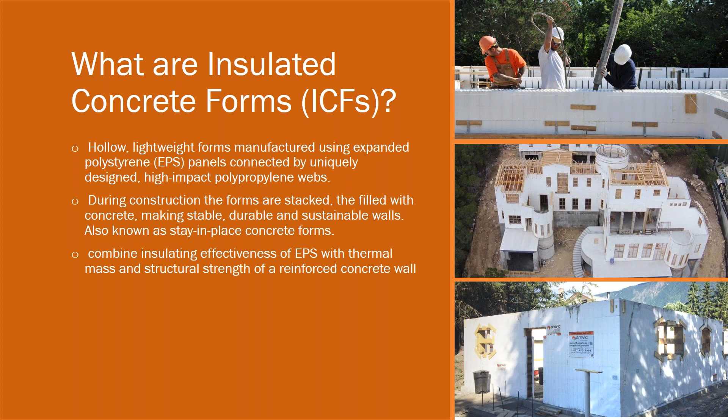When you're doing it for as long as I have, we don't assume anything, so what are insulated concrete forms? ICFs, that's our industry acronym. Basically, they're hollow, lightweight forms manufactured using expanded polystyrene, EPS panels, connected by uniquely designed high-impact polypropylene webs. During construction, the forms are simply stacked, then filled with concrete, making stable, durable, and sustainable walls. We're also known as a stay-in-place concrete form. The combined insulating effect of EPS with the thermal mass and structural strength of a reinforced concrete wall gives you a superior building envelope.

Why use ICFs for your multi-story build? I put resiliency at the top of my list here today, and anyone who knows me knows I have a background in green. I used to be an environmental consultant, and that's what I breathe a lot of passion into. Mark my words, this word resiliency will be the next green movement in the United States, if it hasn't already started. I want to come back to that. Energy efficiency, of course, is huge. In the early days, we were definitely moving people towards net zero structures. We're doing net zero ICF schools now in Kentucky of all places.

By getting that baseline demand down, we can start to play a little bit, and that gives us some really interesting results. Sound attenuation: I personally live in my second ICF home. Anyone who is a tenant in an ICF structure or resides in an ICF home, the very first thing they will say is how quiet the structure is. And of course, that's all part of comfort, and if we have comfort, that means we're going to get retention. Fast construction methodology means earlier occupancy and fast return on investment. Insurance reduction, significantly reduced long-term maintenance costs, and tenant retention.

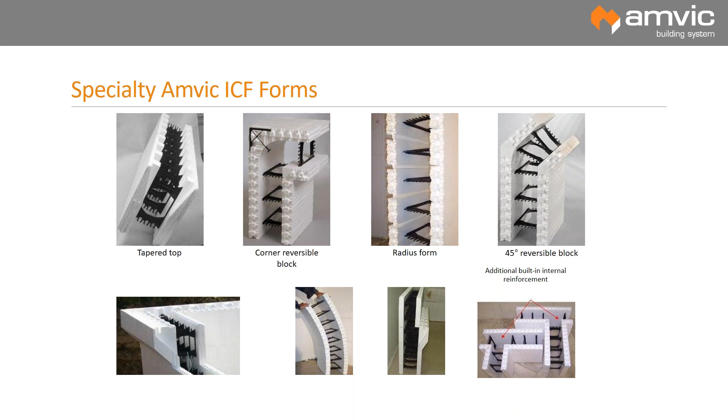This 9-to-1 construction methodology, I'm kind of the laughing joke in the company because I keep increasing this number. It used to be like a 4-to-1 or 5-to-1. But we have so many cool things that happen once this form is in play. It's a perfect substrate for acrylic, a hard stucco coat. And I argued in one back in 2006 that ICFs do not equal EIFS.

For anyone who's been involved in the EIFS industry, exterior insulated finish system, they were involved in a lot of class action lawsuits, because water would migrate past the foam board and get in behind to a wood stud, and then we'd have all kinds of issues. We're simply rendering a coating over the EPS foam.

And some of you may or may not know that Amvic is an EIFS supplier. We actually make 2x4 foot panels here in Toronto to very close tolerances to support the EIFS industry. And we're basically using the same foam bead as we would use in an insulated concrete form. So when you're looking at your acrylic stuccos, which is my preference because of their tensile abilities, it's a perfect adhesion with the ICF.

And with a lot of hard work from myself and others, most of the major stucco suppliers today have details on their websites on how to apply stucco coatings on an ICF wall. Utilities are easily installed with ICFs. After the pour, all we're going to do is simply use that foam as a chase to run our wiring, and most plumbing is done on the interior of the buildings, especially in the north, but it's very easily obtainable.

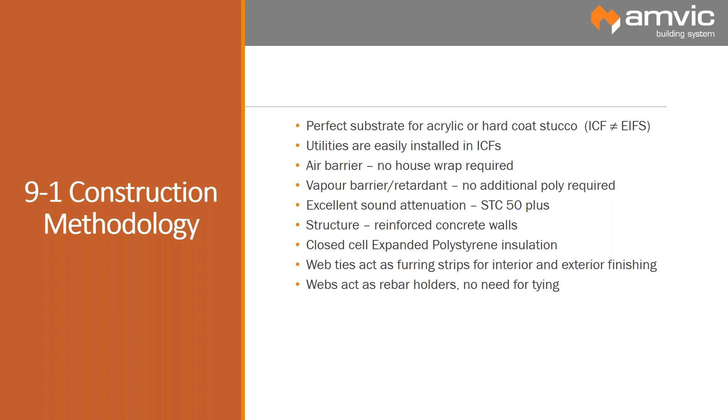Features and benefits: well, ICFs address multiple fire codes in commercial buildings. Just a one-shot deal. We don't have to bring in or address other issues. We address and exceed changing wind and energy codes with no additional layering or reinforcement. I'll come back to that layering in a minute.

Properly designed ICF construction creates minimal waste on job sites, and this is noticeable. Your job sites are cleaner, they're safer, and they're better organized. All the years of doing this, I've never had any serious injuries on an ICF job site, and for a lot of reasons. It can be applied to a relatively unskilled workforce, provided lead hands are properly trained.

ICFs provide perfect concrete curing requirements. Very gradual hydration curves. Strong walls means strong walls. It's not unusual to pump at 3 and have these walls crack at 45 a number of years later. It's just that moisture that's retained in the concrete is a long, slow curing process, versus just strip and have the sun dehydrate the wall and lose a tremendous amount of the strength of the concrete in the process.

ICFs protect concrete from freezing during winter construction, which extends the building season and expedites construction times. It's one of the first patents that came out of Canada. That's why a lot of the ICF companies originated from Canada, since we obviously have a much colder season. But this little exercise here can save literally tens of thousands of dollars by not having to tarp and torpedo heat a building if you are building in areas with winter construction.

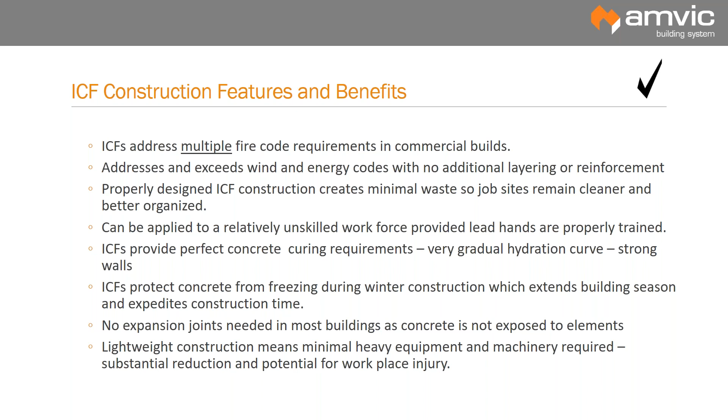Earlier occupancy: we looked at our occupancy rate, which grew from 2009 to 2015 from 54 to 65%. We've seen a relatively large surge in new hotel development throughout the United States. And this earlier occupancy for hotel owners is huge.

So with one of our Amvic customers, on a very conservative calculation, on a 50% earlier occupancy, it was a 180 room hotel. And we looked at a very conservative case where at that particular time only 90 rooms were occupied. And if we can get them in 2 months earlier, which is typically normal, that's 60 days. This computes to over $500,000 in revenue that's immediately going into your owner's pocket. The same will hold true when we get into multi-story apartment buildings, etc.

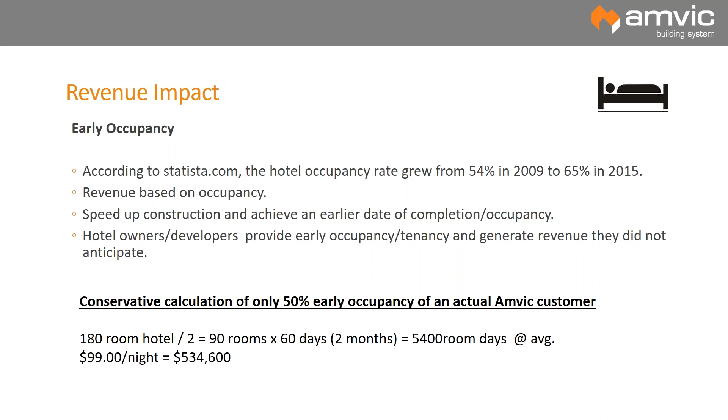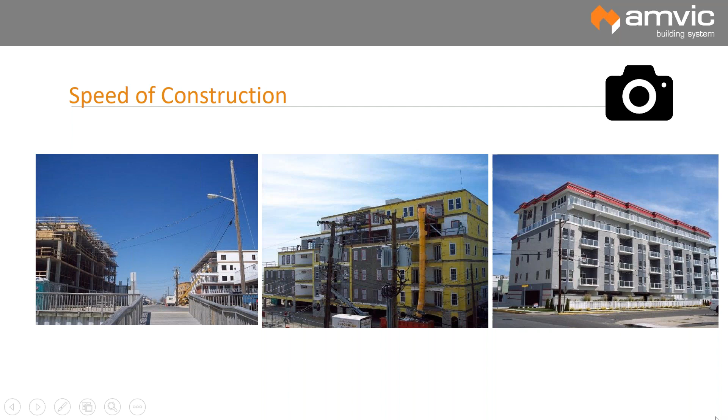So some examples of this. These are condominiums in New Jersey. You can see on the far left that we have traditional stick frame going up here, and then we're looking at an ICF structure here. Very quickly, we surpassed the stick frame. This is where the ICF structure ended up, and this is where the stick frame structure ended up. This product is now ready for leasing and renting. These people are still probably 2 to 4 months out. So what building would you like to be involved in owning and capturing that increased revenue?

When we look at getting into large stuff, I always say twice around the perimeter and done. I can't tell you how many times I've pulled up to buildings and watched them layer the building, going around and around the building. You can see here my lower levels are already closed in. Drywall is already in these rooms, although covered. And now we're looking at where the building is here, and we're ready to go that second time around and do our finishing. You also notice that no one's working on the outside of the building.

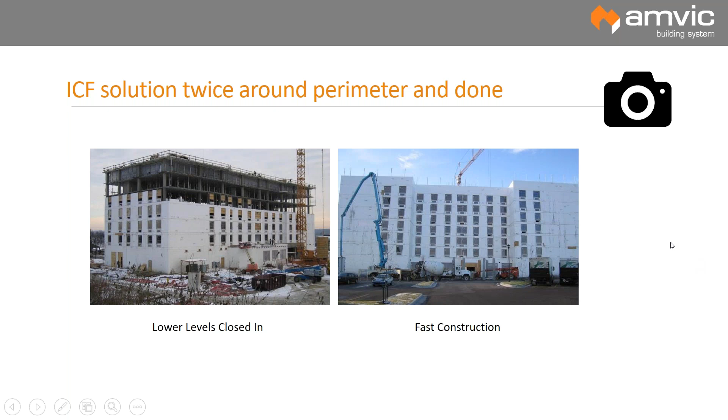Again, it's just the process: stack, brace, pour, floor. We're working from the interior out. So again, your safety risks go down. If I had my way in a perfect world, I really would be lobbying the Workmen's Compensation Group to get us a much reduced rate in this type of construction, simply because it's lightweight and we're preventing things like serious high falls. And then we're ramping things up even faster now.

So this is compliments of ICF Panelization out of Albany, New York. Mike Cleary and Stephen Bluestone are the owners of this company. Stephen Bluestone, I'll come back to Steve in a minute, is definitely an early adopter of ICF, and this is the next stage we're heading to now. In my humble opinion, our most challenging aspect in North America today is labor, and how fast can we get structures up? So we're looking at doing things a little bit differently.

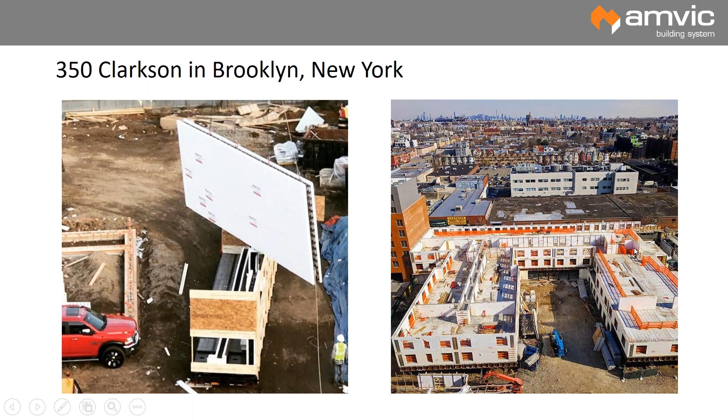This is an 8-story structure currently under construction in New York City, and the panels are manufactured in Albany, New York, and shipped down, basically ready just to be put in place, linked together, and attach the bracing. All the thinking is done in the factory, and then we bring in the pump truck and fill up the wall.

Drury Inn, this is, I guess, a long-term owner operator and an Amvic customer. Today operates over 55 ICF hotels, with 15 typically under construction on a busy year. 55. I always say to people, if this stuff wasn't working, do you think we would have gotten past the first hotel? And on average, most of their buildings are large, 8 to 10 story structures.

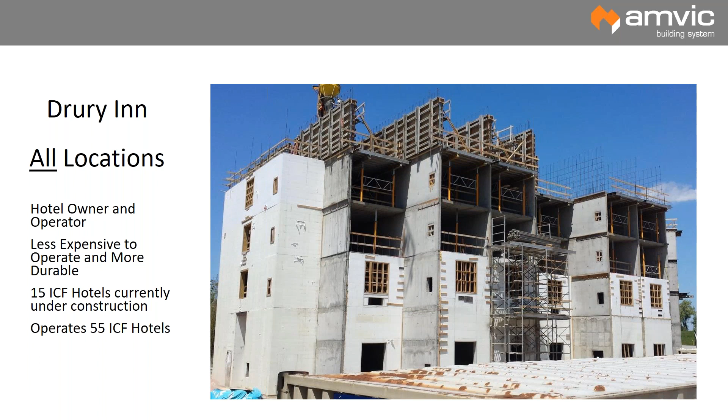Resilience. As I mentioned, I truly believe this is our next green movement in the United States. Last year was the most expensive in recorded history, with $306 billion in recorded damages from Gulf hurricanes and West wildfires. This is $100 billion more than 2005 when Katrina and Ike came ashore.

So IBHS, Institute of Business and Home Safety, I worked with those people in the early years, more or less for residential. I introduced their program to the people in the Carolinas for the first time, and we managed to get some pretty significant reduction in insurance. But now they're reevaluating commercial rates. Underwriters will continue to push for building code changes, particularly in coastal regions.

$306 billion in claims. Achieving disaster resilience with ICF construction is now an AIA accredited program, co-written and authored by Amvic, and you can access that on our website to get AIA credits. But again, things like that word resilience, et cetera, just haven't been in our industry, and they definitely need to be here now.

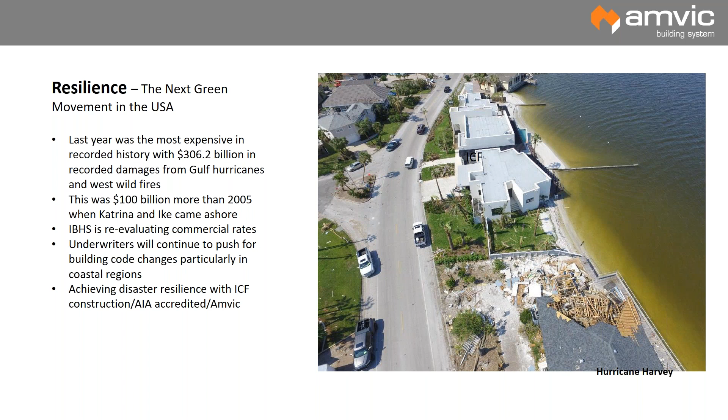So this is Hurricane Harvey, ICF structure there to the north, and then conventional stick frame to the south. I know this is residential, but think of the cumulative damages if we're looking at multi-story structures now. It really is a no-brainer when it comes to these wall assemblies. Wind loads, again, 200 to 300 mile an hour. It can be ramped up according to how we're placing our steel, compared to 120 mile per hour for stick frame.

The bigger thing too, we did projectile tests in the early days in Georgia. The first one I believe is in Georgia. This one says Texas Tech, where we're actually shooting projectiles at walls. Typical stick frame construction, those projectiles go right through the wall. Obviously, they just disintegrate when they hit an ICF wall. And they also will obviously be prohibited on a CMU, but I'll come back to the CMU in a minute.

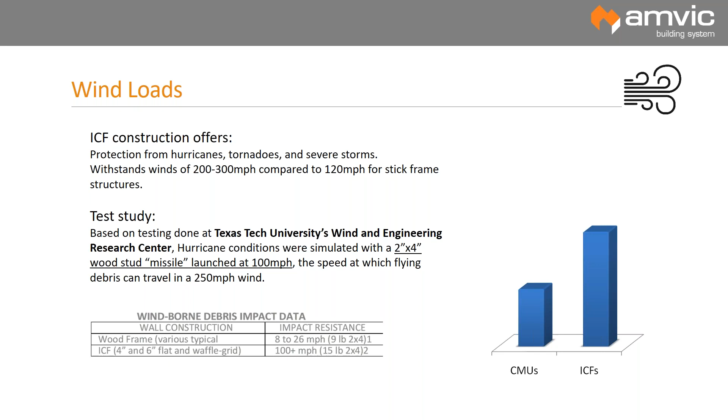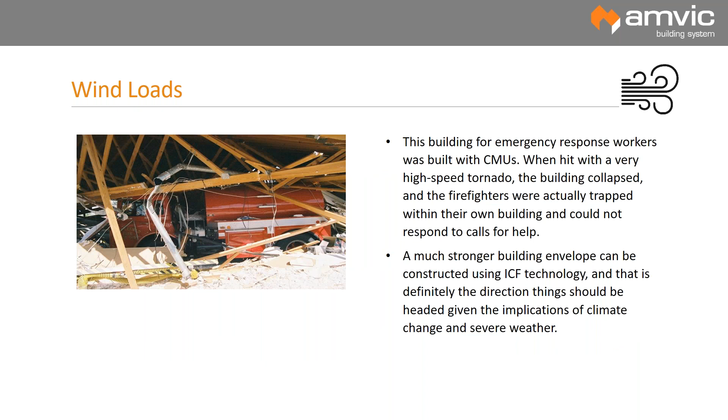So this is a fire station, took a direct hit of a tornado in Missouri. This was particularly embarrassing. The firefighters were trapped within their own building, and they just said we need to come up with a better way as things continue to change with climate and severe weather. So we rebuilt this structure. We used an 8-inch ICF. When you hear me say 8-inch or 6-inch, I'm always referring to the concrete core width. And we rebuilt this structure in record time.

As you can see, not a lot of openings, which is an ICF installer's dream. Your difficulties or your hiccups will be window and door openings. And we rebuilt this to an F5 standard, I believe, with large precast roof panels. You can see the beam pockets that were just cut into the ICF wall for these precast units to rest in and bear directly on the 8-inch concrete wall.

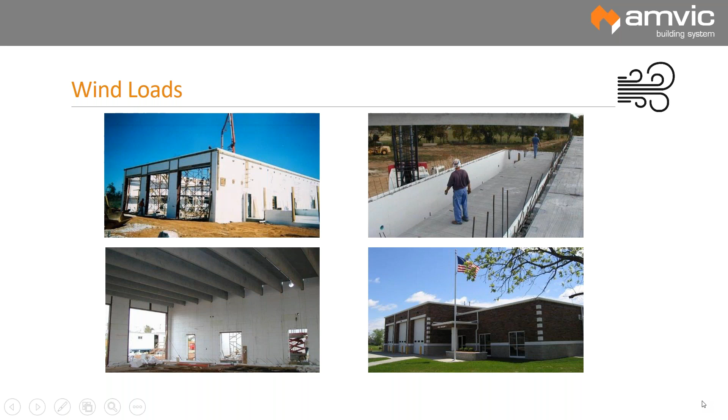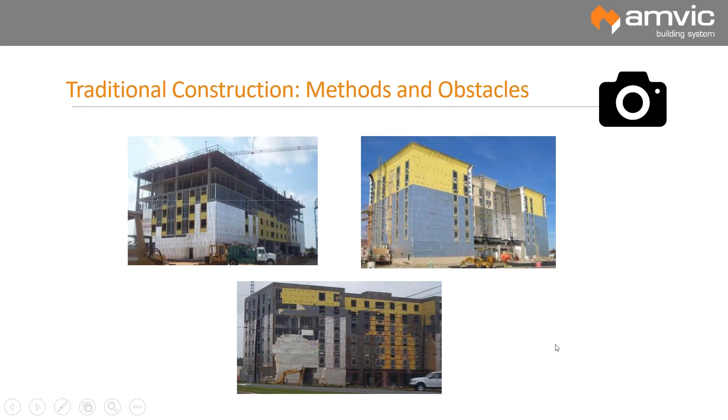But let's look at multi-story now, and this is one of the key reasons why Drury Inn moved to ICF. They got caught in a severe storm event. They typically do a steel stud EIFS assembly on the outside of their buildings. As you can see here, after the severe storm, it basically ripped the foam right off the steel stud. This was a multi-million-dollar claim. This hotel was about, I believe, 2 years late in opening. And that's when they sat down and said, we really need to rethink how we're building our structures.

Fire codes. Well, insulated concrete forms are very resistant to heat. 2 to 3 to 4 hour interior fire rating is easily obtainable. Basically, we have to be covered by a 15-minute thermal barrier, and there's some interesting things happening there besides just drywall. But the reality is we have that huge concrete core that provides phenomenal flame resistance. We're basically building structures that are just basically non-combustible.

By law, we have to have a flame retardant in expanded polystyrene. This is not foam packaging, which goes up like gasoline. EPS will self-extinguish without a constant heat source.

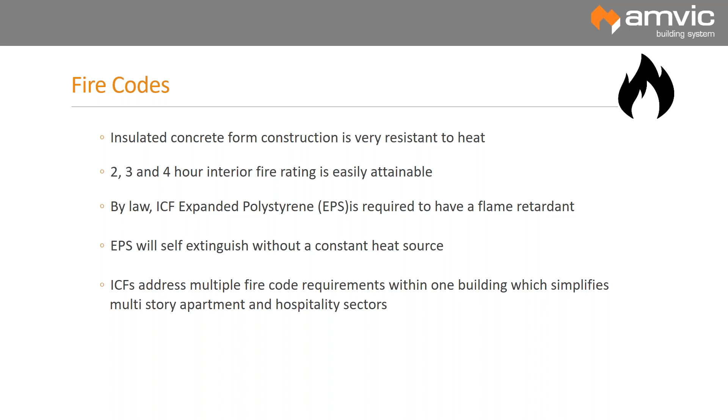ICFs address multiple code requirements within one building, which simplifies multi-story apartment and hospitality sectors. This is something that is very, very current. This presentation was done in November. U.S. fire marshals are going to drive change in the United States.

The current wood lobbying efforts to date, $33 million since 2012, have now allowed 4 to 7 story multi-story wood structures to be constructed with some devastating results. Please visit NRMCA's site and look at America's Burning, as they list numerous multi-story structures that have caught fire. These wood structures reach flash point in under 3 minutes, dramatically endangering first responders and occupants.

Just so you know, 3 minutes is basically the time the trucks are rolling out of the station. So when these trucks are coming to your particular multi-story building, all they can do is contain the fire. And these buildings are sprinklered as well, but when you have that amount of lumber with that amount of oxygen on multi-story, they become just infernos.

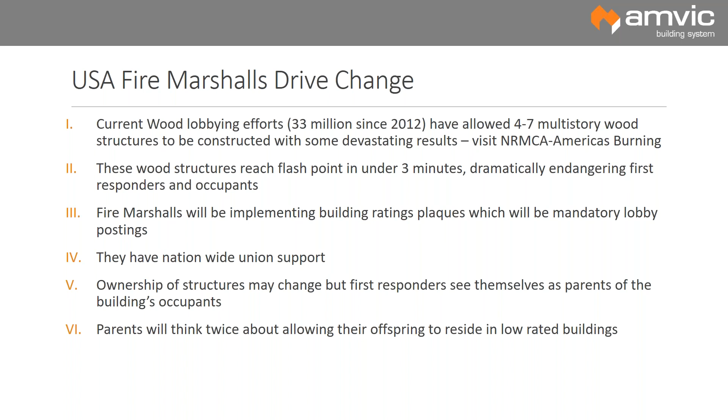Fire marshals will be implementing building rating plaques, which will be mandatory lobby postings. They have nationwide support. They have nationwide union support. Ownership of structures may change, but in their opinion, first responders see themselves as parents of the building's occupants. Parents will think twice about allowing their offspring to reside in low-rated buildings. So watch how this movement gains momentum because it's a serious problem and it needs to be exposed.

Resistive to explosive environments, something you would not think of. I was at Quantico Marine Corps Base, I believe this was 2006, and we detonated 50 pounds of military-grade TNT next to our ICF wall. That wall was nothing special. We had 16-inch, number 4 bar, 16-inch on center, 3,000 PSI. Basically on the far right here, you'll see after the blast, the concussion of the blast blew the foam off and exposed our polypropylene webs, but the structure stayed. So consequently, we get involved in a lot of first responder buildings, fire stations, police stations, military bases, etc.

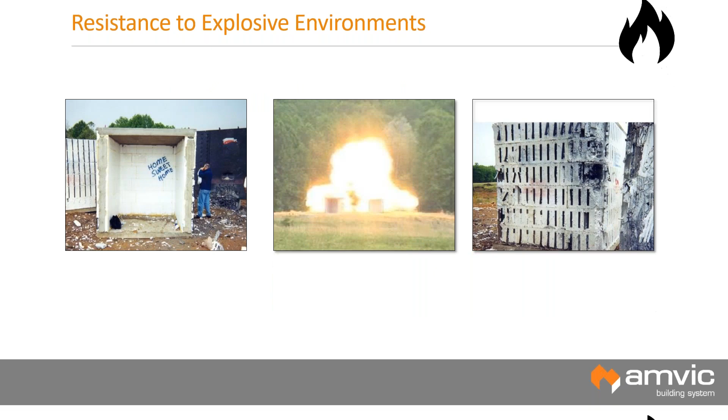Another dramatic example of this, compliments of Steve Bluestone. This was his building in New York City, and it was right sandwiched between a terrible natural gas explosion, which actually cost lives and completely demolished the building. But his ICF structure just received superficial damage, and he was able to get his tenants back in the building and occupied. Again, just a kind of a tribute to how strong these walls are.

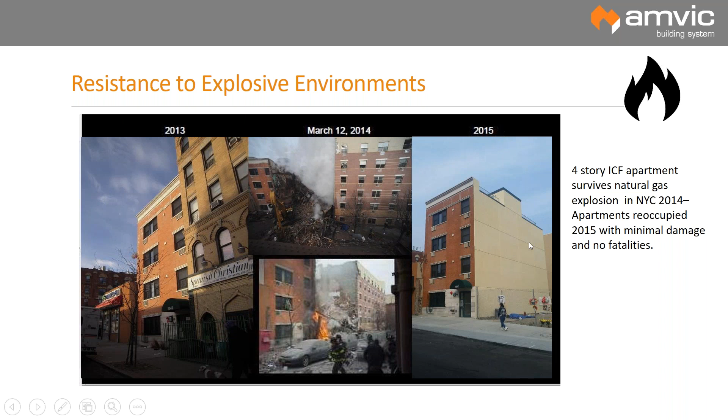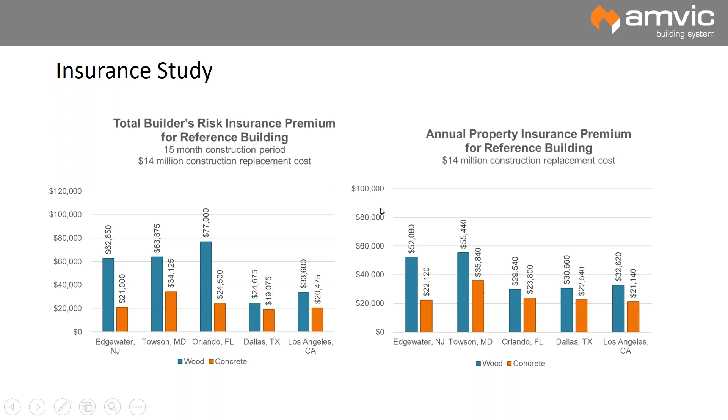Insurance study, we're getting more and more data in depending on different areas. But when you get into non-combustible, high wind, that type of thing, you're looking at possibly having greater savings on your insurance. If you look at some places like Orlando, Florida, look at the difference on concrete versus wood. And this is not surprising to me because obviously these areas are subject to a lot of very severe weather. And again, this adds to your bottom line as the owner developer, capturing much lower insurance.

Maintenance costs: effective 100-year service life, 200-pound pull-outs, no drywall pops, soft costs reduced, minimal repairs after severe storm events, no hollow wall cavity for potential moisture migration, i.e. mold development. In most of the southeast and south of the United States, when we get a severe storm event, I'm thinking of places like the Carolinas, Georgia, Mississippi, Florida, far over into Texas, if that stick frame wall is compromised, we'll get mold development within 24 hours. And obviously, if you have a multi-story structure and rumor gets out that there's mold in the building, you're going to have a difficult time getting tenants who wish to move into that structure.

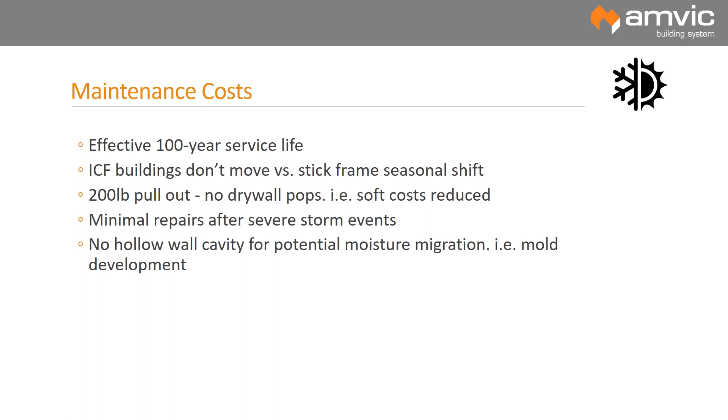So in the north, we have obviously much more severe weather, but I always say what happens 4 times a year? Well, 4 times a year we have a new season. And when we're looking at something like stick frame, that building will move. And when it moves, it creates problems and actually leads to the demise of the building because movement creates stress, stress creates cracks, cracks allow moisture infiltration, and now we have a much greater problem. So maintenance costs in ICFs are virtually non-existent.

Operating costs. We talked a little bit about that, but let's dig down a little bit further. A reputable hotel chain, we downsized their PTAC units from 9,000 BTUs to 6,500 BTUs. That's 240 volts to 120 volt wiring. The savings alone on that 5-story hotel was over $80,000 just in hard equipment and wiring costs. U.S. Department of Housing and Urban Development, they say we're looking at a minimum of 20 to 25% savings. I think that's very, very conservative.

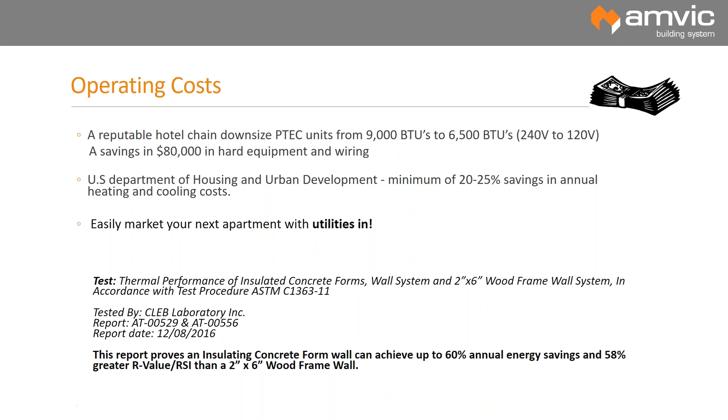In most cases, if you do this correctly, utilities will be so low you can market your apartments with utilities in. And it's been my experience dealing with the millennial population that there's lots of difficulties collecting in regards to additional costs over and above rent. So if you can market utilities in, that's a good thing to be said.

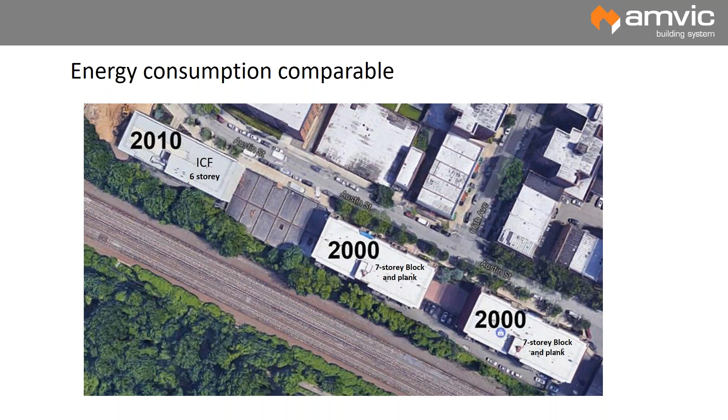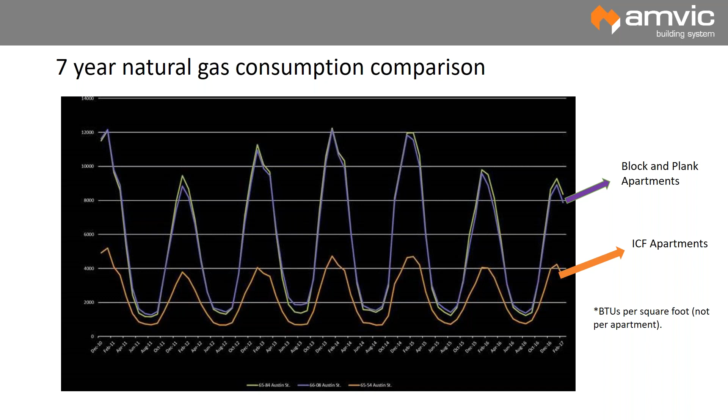So when we look at energy consumption comparables, again, this is compliments of Steve Bluestone, who again was an early adopter. You can see in 2000, he had 2 block and plank structures. And then in 2010, he did an ICF 6-story. But folks, look at the difference in the operating costs in regards to that ICF and block and plank. And what they're doing now is tweaking things like lighting and water conservation, et cetera, where we're going to get this number even lower. So again, a really good testament of how this stuff works. It's probably what others have realized, like Drury Inns, et cetera, that they're really doing well on the energy conservation of these buildings.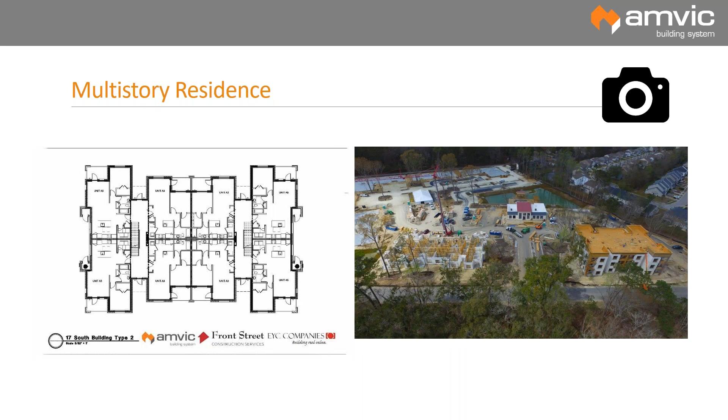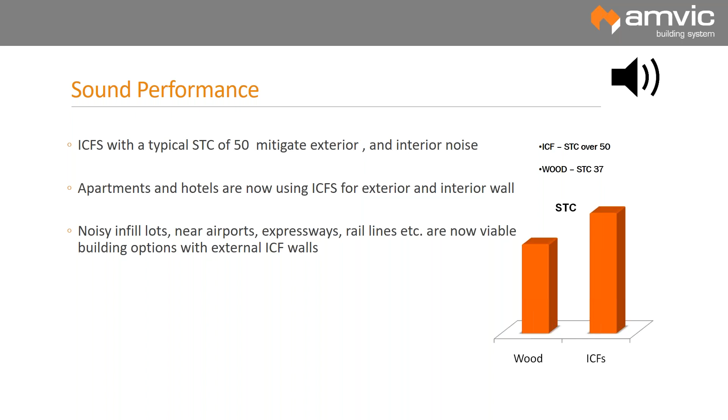So we can get involved in noisy infill lots near airports, expressways, rail lines, etc. We're now viable building options because we can cut that sound down. And on the residential side, anyone who's lived in an ICF structure, the very first thing they will tell us is how quiet the building is. Quiet is definitely a feature of comfort. If we have people who are comfortable, they're going to stay in your apartments, your condos, your retirement buildings. It's a big part of that comfort equation.

HVAC costs, I mentioned we can reduce those. Equipment, heavy machinery costs. Obviously, this is lightweight construction versus heavy construction. Even when we were doing panelization, those are light-duty cranes. We're not slinging huge, heavy mediums into position. Debt financing management: let's dramatically reduce your forward carrying debt.

When we look at stick frame on multi-story, in many cases the carpenters will come in and build extremely fast, and then they have their hand out for payment. Now you're carrying that debt way forward because that building is nowhere near ready for occupancy. We just have a 2-by standing there. Someone's got to come back and sheet it and insulate it and vapor barrier it and air barrier it, et cetera. Long-term maintenance costs obviously are going to be reduced as well.

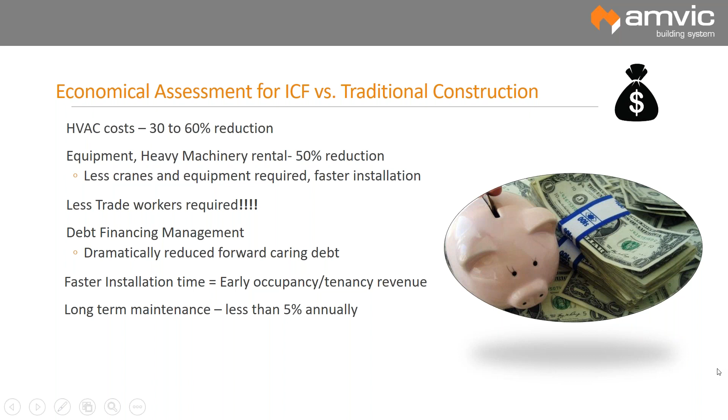So these are all really good stories, and it leads to the conclusion that people that do get involved in our industry with successful ICF builds simply don't go back. And that's our hardest thing, just getting people over that first hump.

So some examples of ICF commercial builds. The gymnasium here on the left was my first venture into the institutional side. This 24-foot high structure is actually sitting on a 4-foot grade beam, which we created with ICFs, which is on pilasters because we were on unstable soils.

The condominium complex is interesting. When we get into northern Canada where this is built, you can see that it has an acrylic stucco finish. He has to have his trades out of there by August 1 so they can start working on the finish, because we can't get into a freeze-thaw cycle. This builder has done numerous condominium developments with every other medium available, and once he used ICF, he's not gone back. Little things like small commercial builds can be done extremely quickly, and obviously we are picking up that ICF envelope.

Now we're getting into some bigger stuff. Student residence in Waterloo, Ontario. This was a 10-inch ICF form all the way to the top. Things have dramatically changed since I went to post-secondary school, where you're renting questionable homes to live in. These are state-of-the-art dormitories, and they're generating a lot of revenue for the investment partners. Anyone who's been involved with post-secondary residential accommodation knows these rooms are filled every fall.

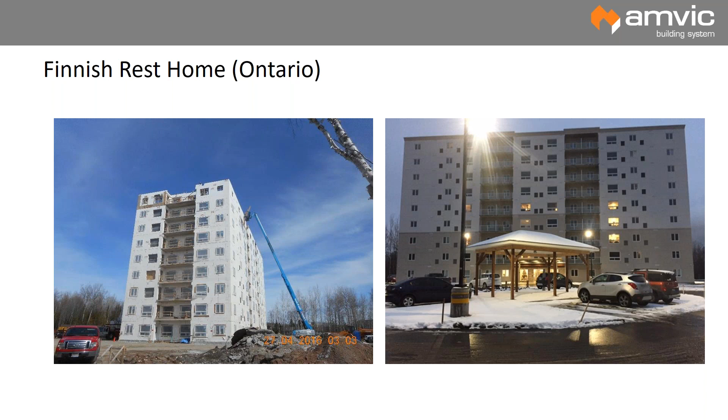Okay, this Finnish rest home was also an award winner this year at World of Concrete. What makes this one interesting is this particular owner developer used our new Plus form, which has an R28 versus an R22. His residents are extremely comfortable in this building, and he has plans to do several more with our technology. He was extremely happy receiving his award. Excuse me.

This is the ICF insurance building in San Antonio, Texas, and this is the one we'd like to play the video on. We're going to try that again. Okay, so I'm going to hand this over to Michelle and hopefully get the video going for you.

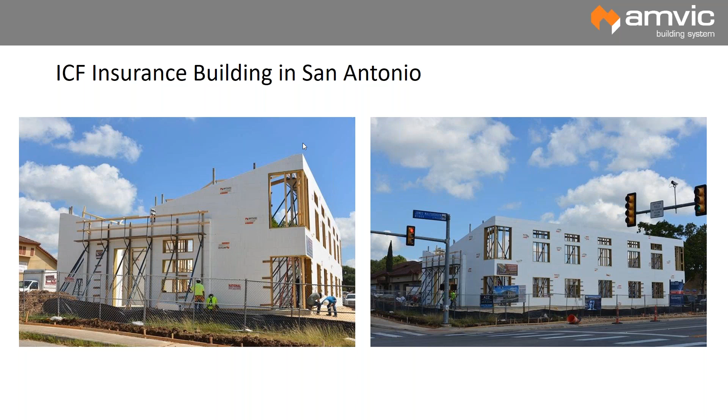Matt's an award-winning ICF installer. We have some more projects of his that we hope to submit for our awards next year, but he's kind of figured this out. This is a 24 to 26 foot high building. It's all one pour. You notice the guys were all working off of man lifts to expedite the stacking. Just a really good testament to what we can do with this product in record time. Obviously, the owner is ecstatic because he has the envelope of his building closed in, and now we're just into cosmetics. Are we ready for any questions? Hang on.

Okay. So what others are saying: the people at Avalon Bay were gracious enough to visit us at Charleston on EYC's development. In their opinion, we figure it's cost neutral. Just so you know, Avalon Bay is arguably one of the largest apartment builders in the United States. They're looking at a +/- 3% construction impact cost. They do believe it's 5 to 20% faster.

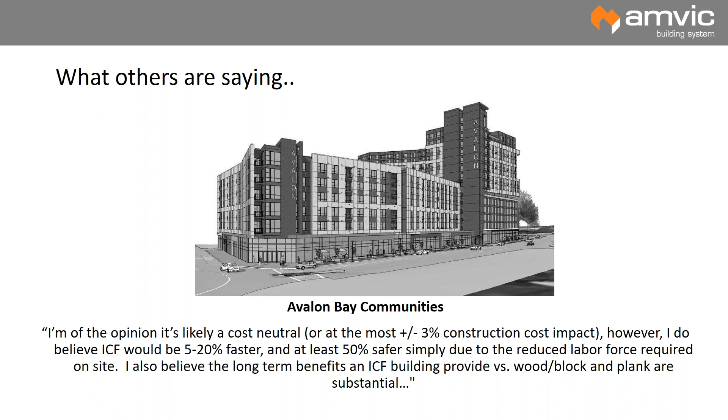I believe with the right approach, we can be a lot faster and at least 50% safer due to reduced labor force. That was one of the biggest things that I observed on the Charleston project, is how few workers were working on that site for such a large site. They also believe the long-term benefits ICF buildings provide versus wood, block, and plank are absolutely substantial.

Quick recap, ICF, insulated concrete form. Well, you should understand that 9-to-1 construction feature. Again, get your trades educated early in the game. I believe some of these costs definitely should be coming down. Capture significant revenue with earlier occupancy. Resilient construction, the next green movement in the United States. Demonstrable lower insurance, maintenance, and operating costs. These are the year in, year out costs that you're paying as a developer and owner.

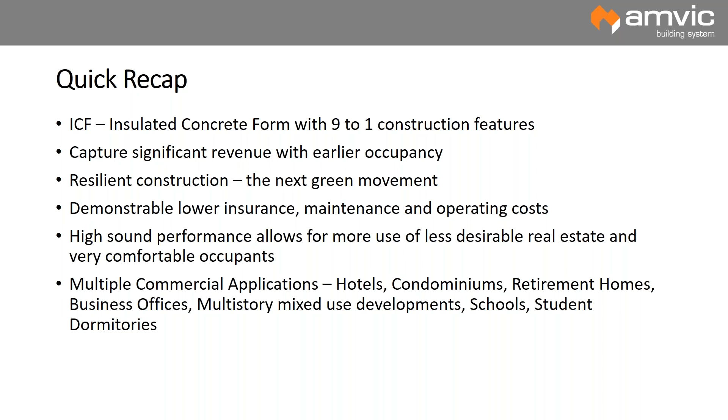High sound performance allows for more use of less desirable real estate and very comfortable occupants. Multiple commercial applications: hotels, condominiums, retirement homes, business offices, multi-story mixed-use developments, schools, student dormitories. Amvic's been involved in all of these and growing. So this concludes my presentation today, and we're going to see if we have any questions that have come in. Anything here now at the moment.

So the first question that's come in here is basically how you get started if you are looking at doing an ICF multi-story commercial build. One, obviously involve us early in the game. I wrote an AIA accredited presentation which I present to people about getting started properly and what happens when you don't start properly.

So aligning yourself with a proper design team, getting those tradespeople involved, and obviously involving us to help you with this process. It's my sincere desire that once you do this and we get you over that first one, which we will support you 200%, that you won't go back to your conventional methodologies of construction.